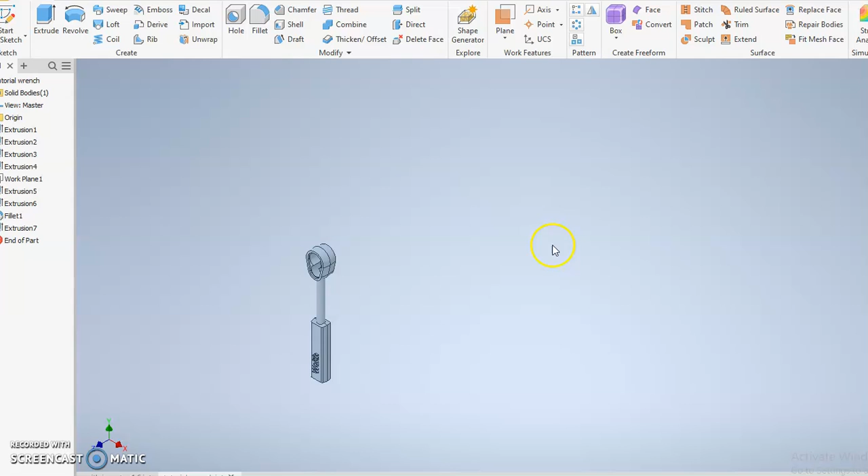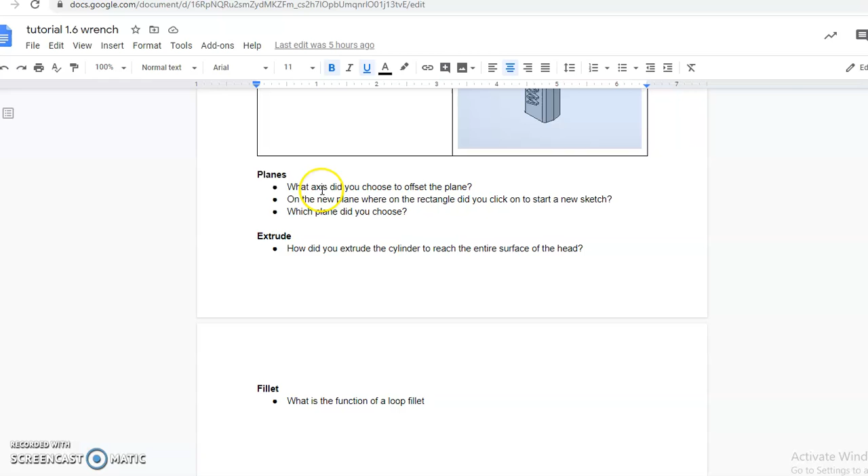And here we go. All right, we're going to make this little wrench guy. This actually would be the inside socket of a wrench without the outside of it with a little square thing, but it's a pretty fun one to make. So, as always, go to your tutorial, and guess what? They're getting shorter and shorter. So we're just going to do planes, extrusions, and fillets.

Aside from Planes, Trains and Automobiles. Name the actors. You've probably never seen it. Anyway, no big deal, but it's a fun movie to watch if you ever want to.

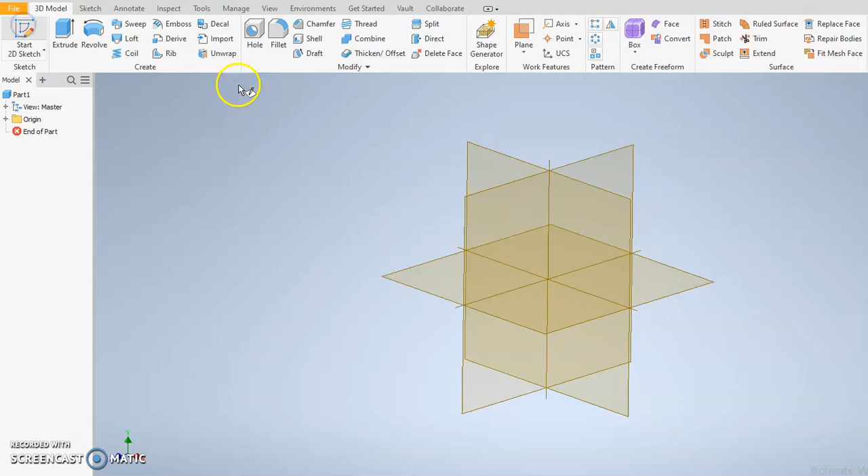So here we go. We're going to go File, New, English, as always, standard (in).ipt. And here we go. Start 2D sketch. And XY plane as always. So, starting off with just drawing a line. So this is going to look really similar to the last one at the start. We're just going to draw some vague angled line right here.

So this is going to look like the keyhole that you just got done making. Or it might have been 2 videos ago. I don't know. I make so many of these, it's hard to tell.

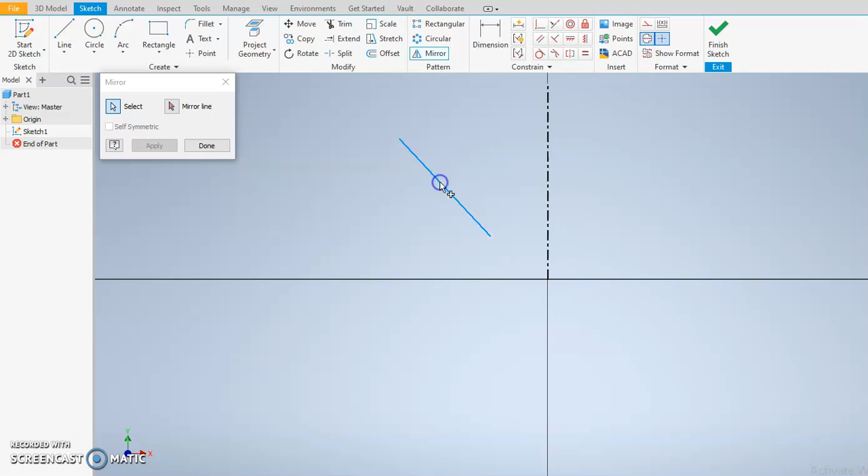All right, so line, another center line, right down the middle. All right. Guess what we're going to do next? Mirror. So click that line, mirror, click this line, press apply. Just so you know, if you actually click this twice, it doesn't matter. If you click it once to select it, then you choose apply, and then you mirror it again, it's fine.

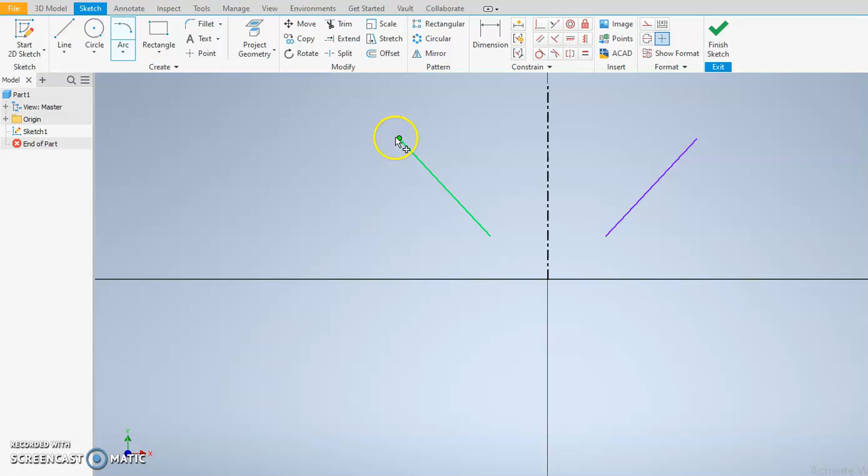Uncheck that guy. Okay. Arc. Same thing. Tangent arcs. Boom. Boom. Boom. Make sure you hit that dot.

Okay, next step is, I got to move my cat here.

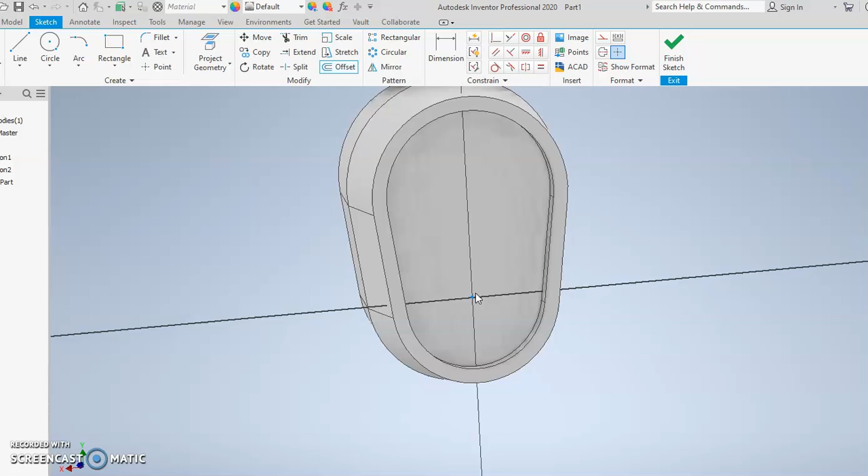Okay, next step is we're going to do a new sketch on this plane here. Sorry, I about choked. All right, so we're going to show you guys some handy little tools. So luckily for us, this one already has a dot on it because I need the center part of this circle here. So I'm going to just press circle right there. And I'm going to click the middle of this. I'm going to make this 0.75.

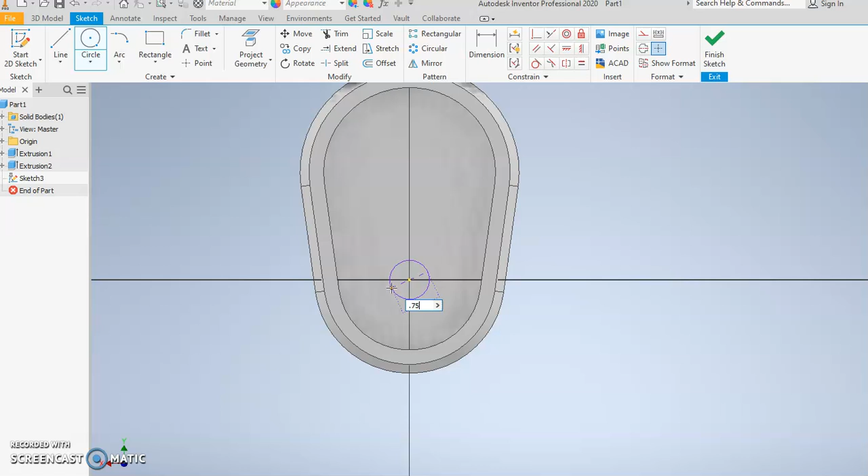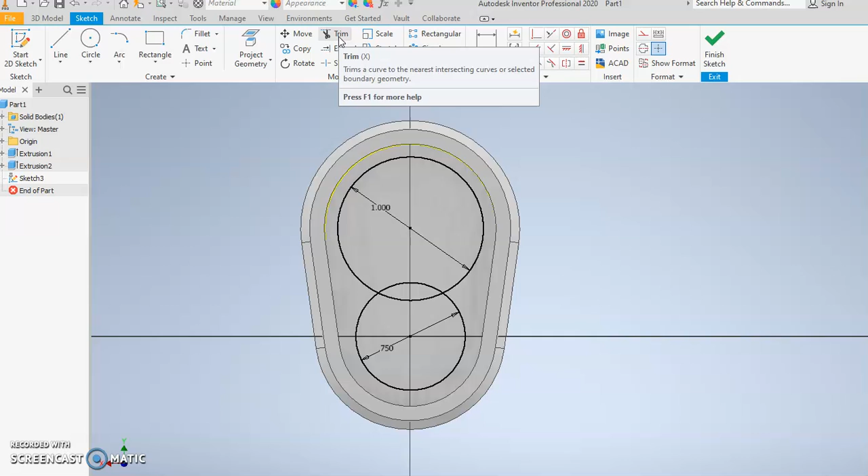Now, I need to get this one here too. And if I touch this, I'm not clicking, I just touched it, it'll give me a circle as well. So I'm going to make this 1. Got it. Okay. Sorry about that. I made a little mistake. So I need to do a trim. Let me show you something really cool about trim. So if you click trim, and if you left click and hold, you can trim multiple things at one time. Really cool little tool there. So do that and then press finish sketch.

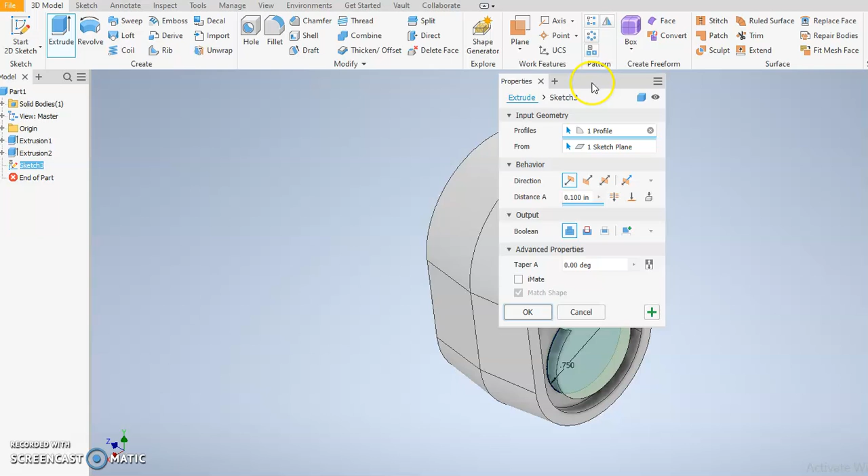Now we're good. So we're going to do another cut. We're going to press extrude. And you're going to go in 0.75. So 0.75. I said 0.75, folks. So it should be getting to where it's near the bottom of it, but not quite there.

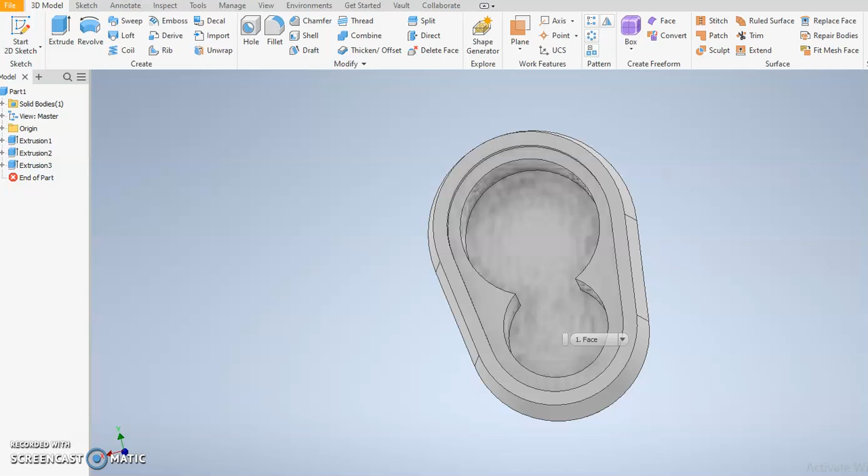So I could do this next one in 2 different ways. I'm going to do this the easy way. So let's use the hole feature. Try and avoid making a sketch if you can by using hole features and other things like that. It'll save you a lot of time later on, and it's good practice. So anyway, we're going to click somewhere in here. I'm going to click the edge. And we're going to make this 0.5 for this one. So just take this at 0.5.

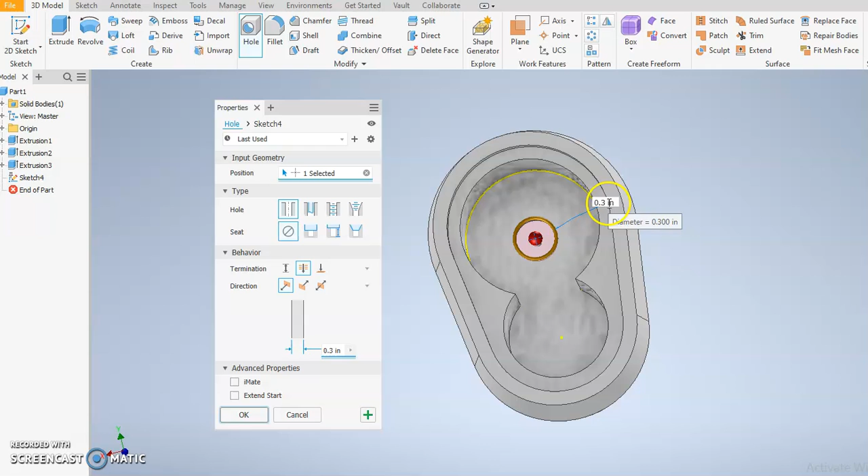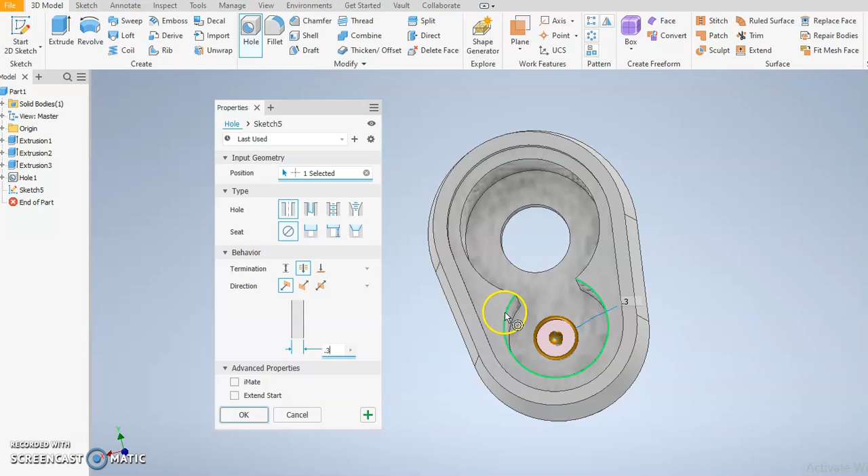And actually watch this. I'll just go ahead and press OK. I'm going to do it again. Another hole. I need to do that because otherwise it'll change them both. So I thought I could do it both at one time, but I don't think I can. So I'm going to choose here. This one's going to be 0.3. And once again, you have to click the outside circle to set it. Otherwise, it's not centered. And press OK. So now we're good. So the actual head of the wrench is done.

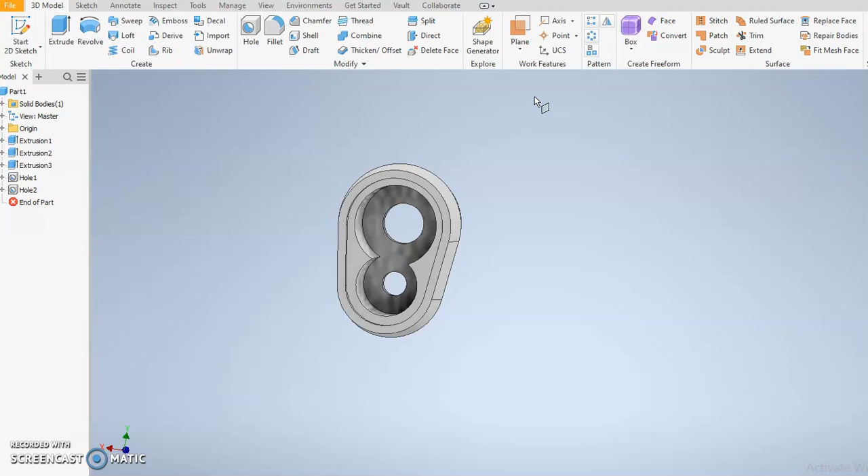Now we're going to learn how to do an offset plane. So to do these, you go down arrow for plane and go offset plane. Follow me step by step, please. Don't worry about the worksheet yet. Hit plus on the origin. This will allow you to see different planes on your object. So this is why it's really important to have a definite starting point. So I'm going to choose the XZ plane. Now you see this, I can pull it down. If I go down, it goes negative.

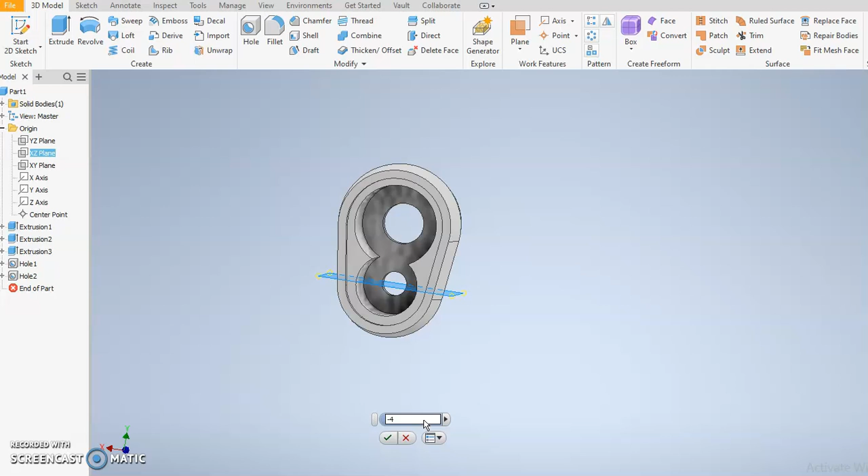So I'm going to go -4 and press enter. Zoom out and you'll see it. So I know on the sheet it will ask you what part of the square do you hit. If I click the middle, nothing's going to happen. So I need to make a new sketch right on here. But I just want to hit this right here. So I'm going to click on this work plane and go create sketch.

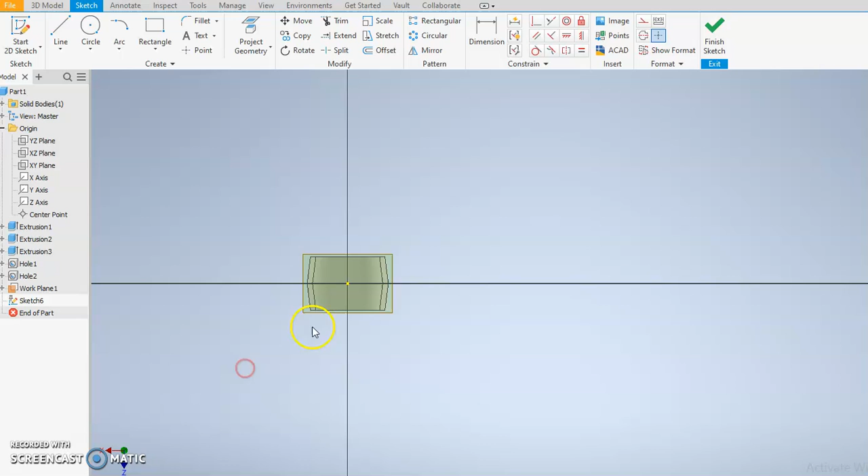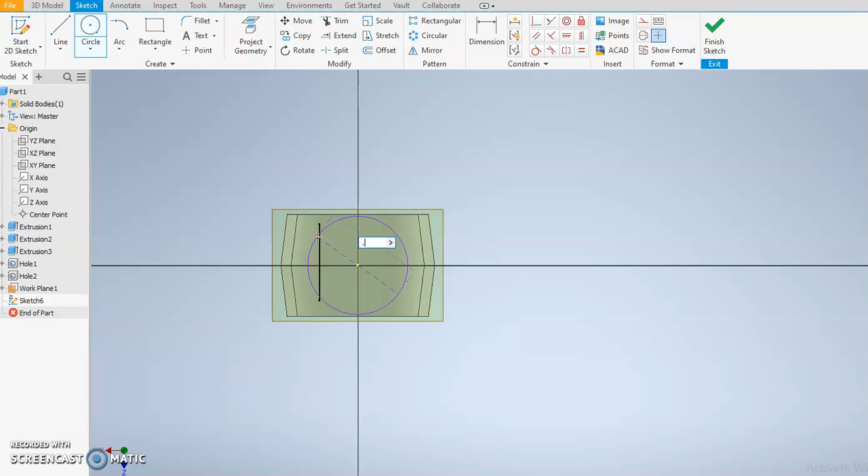And there we go. So the great thing about this, the reason why you did the symmetric extrude at the start is so we could keep this middle line right here. It makes life so much easier. So next we need to do a circle. All right, basic old circle. And we are going to make this 0.75. Press enter. Hit finish sketch. Okay. The next thing on the worksheet I do is a different type of extrude.

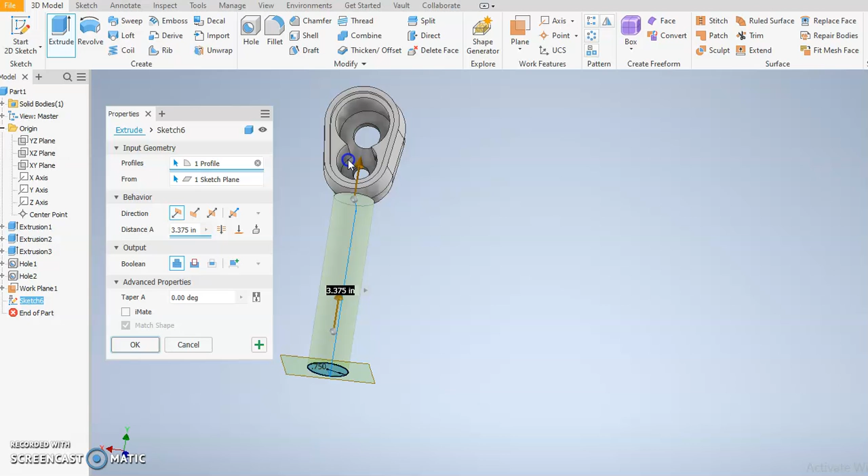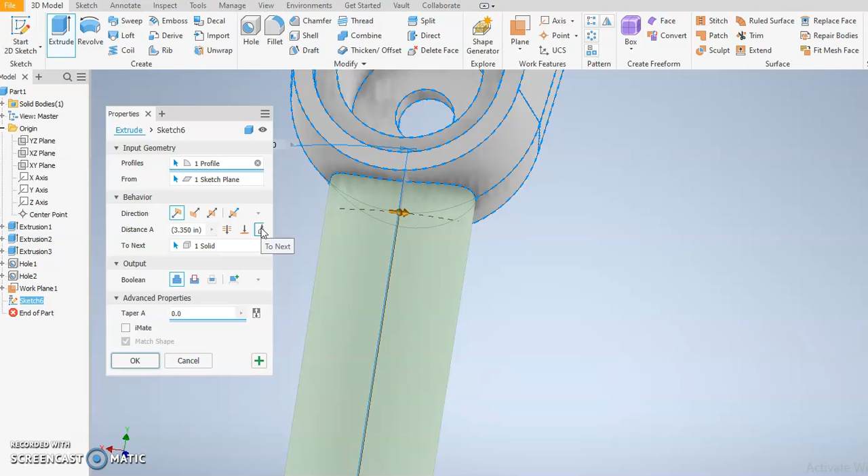So follow me carefully. You're going to click extrude. And now you could just extrude this all the way up here, but the problem is it's not going to create a good attachment to the head here. So here's what I'm going to do. There's a To Next button, and what it does is it shoots it right to the top, so it creates the curvature right there. It doesn't go through it, it just hits it, and it hits all the curves. So that's what I want. So it's this little icon right here that says To Next. And press OK. We're rolling along good.

All right, so I'm done with this work plane, and I hate seeing them on the screen when I don't need them. So in order to get rid of them, you want to left click it, and then there should be a visibility. And if you click that, it goes bye-bye. Okay, so we got one more step left, and that is making the handlebar down here. We got a few more things to do to it, but that's pretty much it.

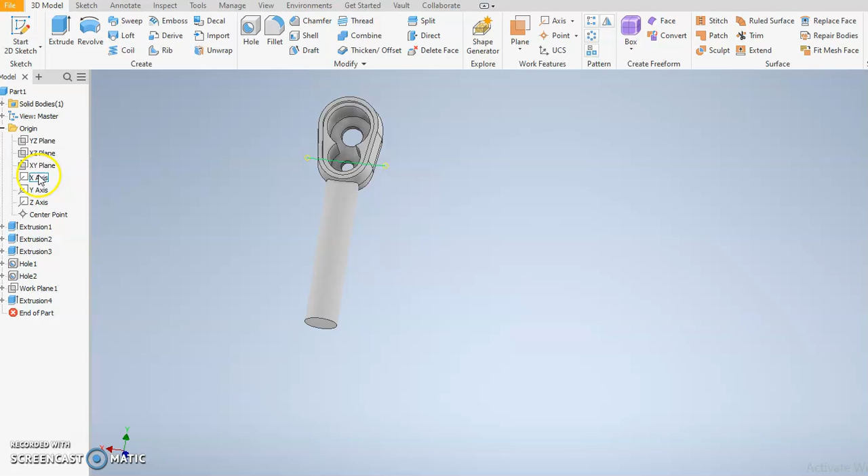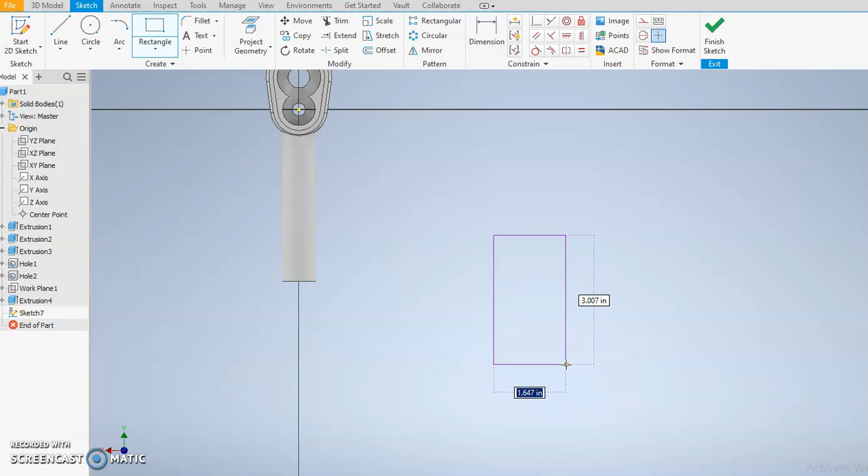So I'm going to go on the XY plane now and do a new sketch. So I'm going to do this really weird. You might think it's weird, but actually it will make a whole lot of sense once I'm done. So somewhere out here, we're going to make a rectangle. Just dump it out here somewhere because we're going to put it in the right spot. So remember the tab button going back and forth? The bottom should say 1, the side should say 4. And press enter.

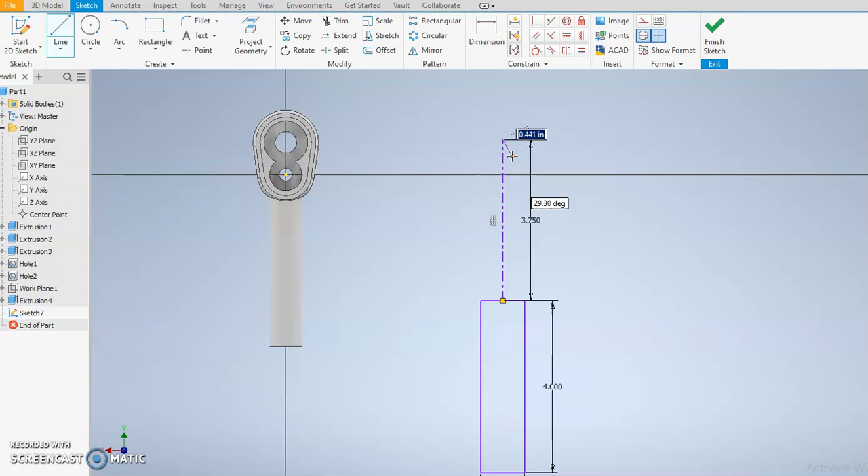We're going to try to line this up with the middle of this, but to do that, I need a line. So we're going to do a center line from the middle of this going up 3.75. Okay? So now I'm going to show you guys how to move something. You gotta move it, move it. Sorry.

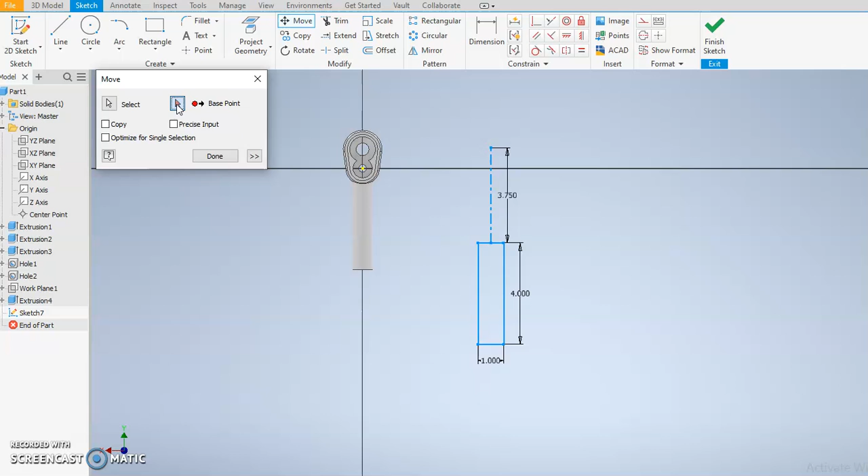Actually, don't highlight anything. Hit move. There's a move button up here someplace. There it is. Highlight the whole thing. So kind of like AutoCAD, you highlight, but then you need a base point. In AutoCAD, actually same thing. So I'm going to click base point once I have my object highlighted. Click this, and then click the middle.

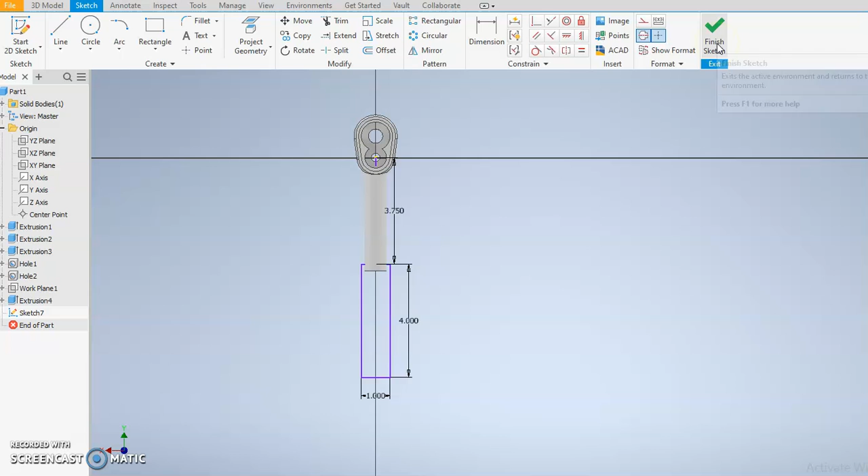So you might have been wondering why it was really important to anchor this to the middle. This is why. It makes life easier. I could have done a project geometry, found the center point, done a few more steps, and it would have worked fine too, but I don't like working harder than I have to. Press your finish sketch. Next, we're going to do an extrusion, just like we've done. Guess what? We're going to do a symmetric one, and we're going to make this 1, so it's as wide as the head. Press OK. Okay, rolling along good, folks.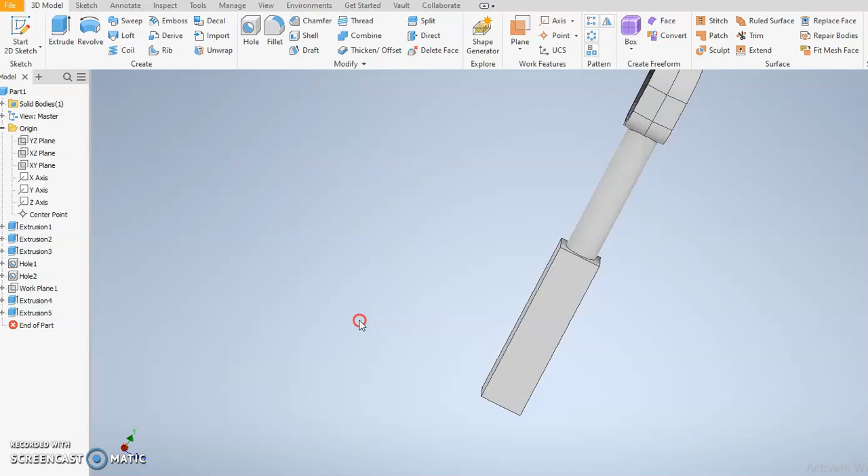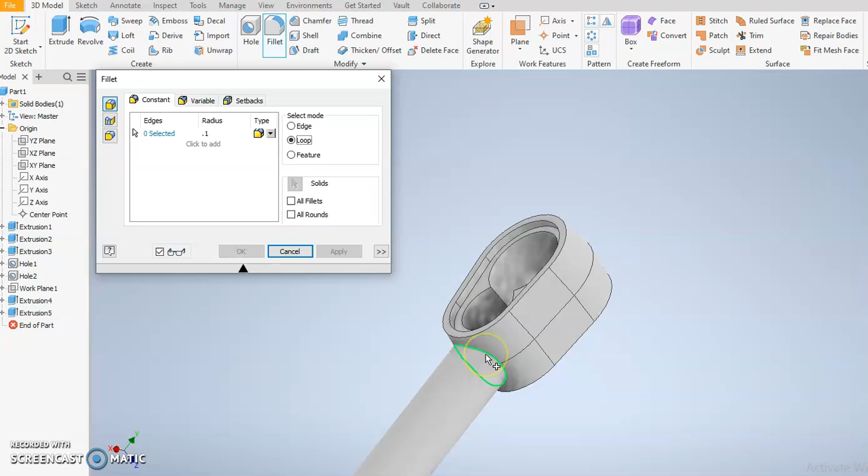So I'm going to show you guys a new fillet here. This is my new friend. This is called a loop. Okay, the function of the loop is it helps get around those complex curves right here. So here's what I'm going to do. I'm going to set this to 0.1. I'm going to click loop. Oops, that did the wrong one. I apologize. Fillet, loop. Now, if I click right here, it'll just do the underneath head. I'm also going to do it down here too, just so the wrench has a bit more strength when it's being used.

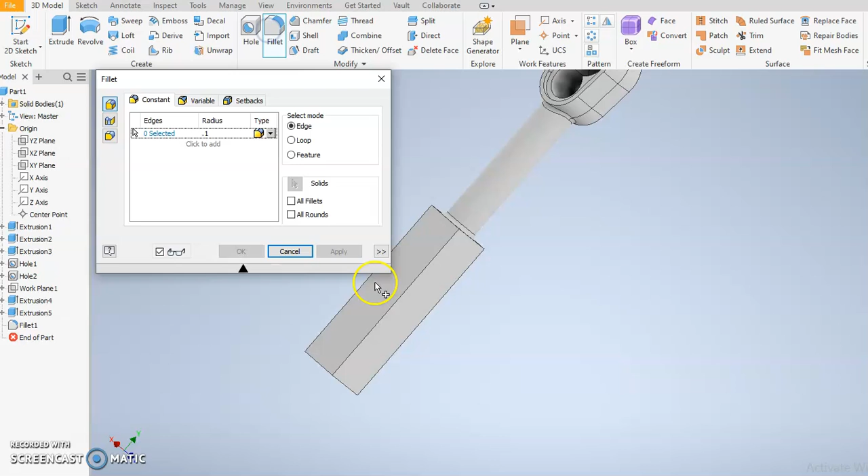You'd also notice that the sides are way too rigid on here, so I'm going to do a fillet there too, and we'll just keep it that same 0.1. Probably should have just stayed in that command and done it anyway, but that's okay. So we have all those things filleted.

Now I want to do some basic text, just so I see your pretty little names on here. So we're going to do a new sketch right here, but I'm going to do this one a little differently. I've learned with making text that if you just dump in text someplace, it can go all different ways, and then you have to rotate, and it's a big pain. I don't like doing that anymore. So I'm going to draw a line here, just some vacant line right there. It doesn't matter how big it is. It's just going to be our base point.

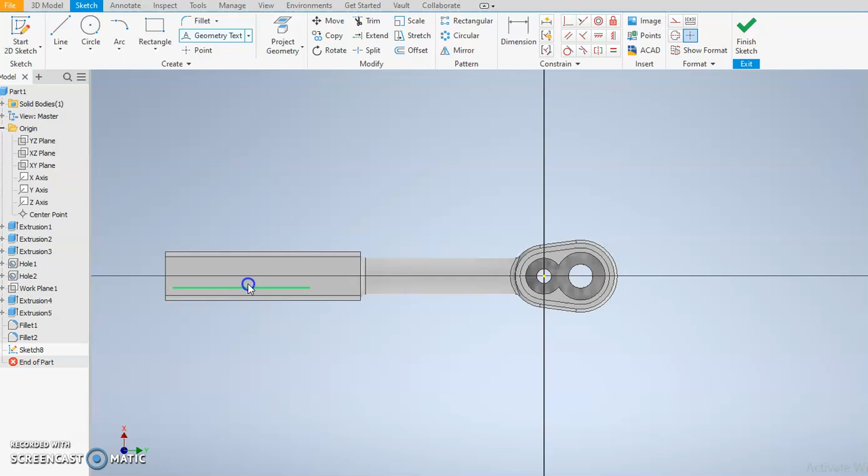So I'm going to go down arrow and geometry text. We did this a couple videos ago, but it was on an arc, I believe. So click this. I'm going to click the line right here. I'm going to change my text size to 0.4 and type in your last name or your first name or both. Press Finish Sketch.

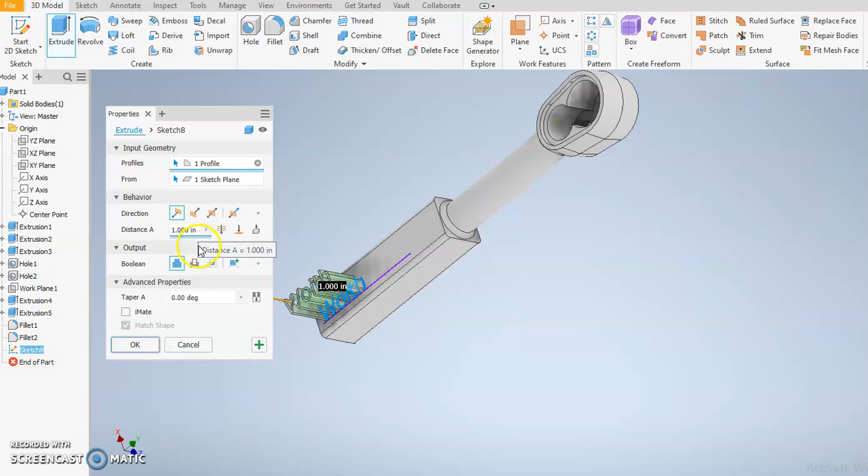Okay, so I have two options here. I could extrude it. It'll work fine. I could do a 0.1 extrusion, or I can do an emboss. Doesn't matter. I just want it above the surface. I'm going to press OK. It's done. You're finished. Good job. If you wish to color it, go ahead. I could care less. So now remember, we're going to save these.

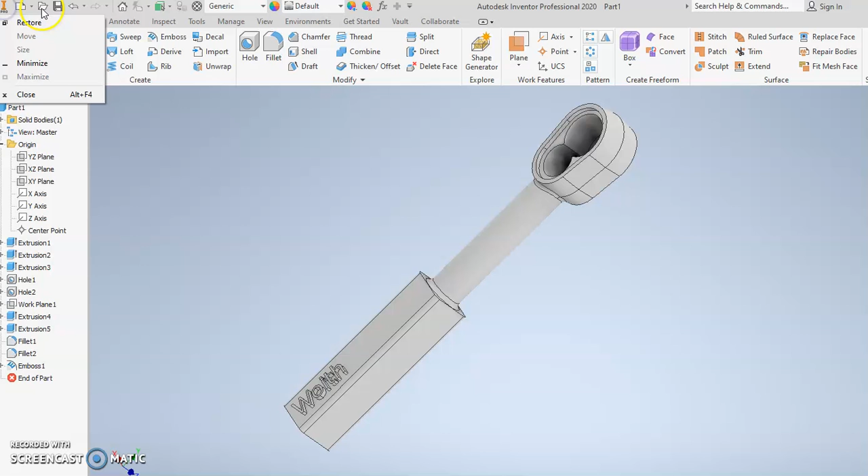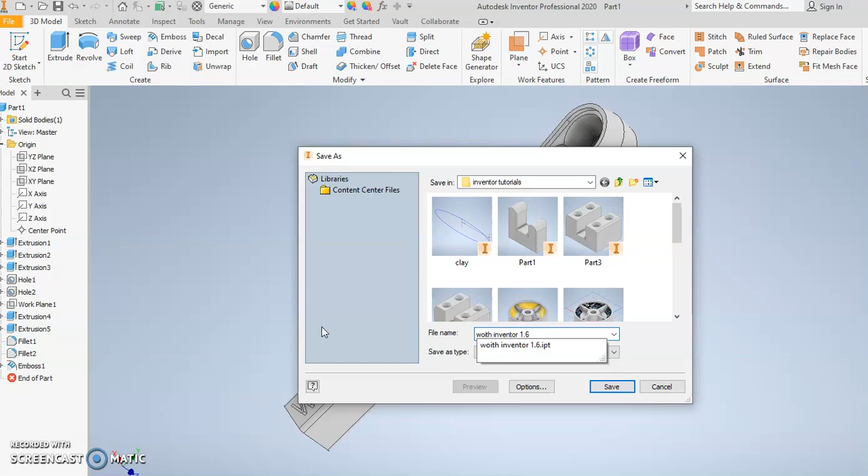Save as. We're going to do your last name, inventor, can't type today, 1.6. I already have one on here, so I'm going to add an A afterward because I've done this twice. So there we go.

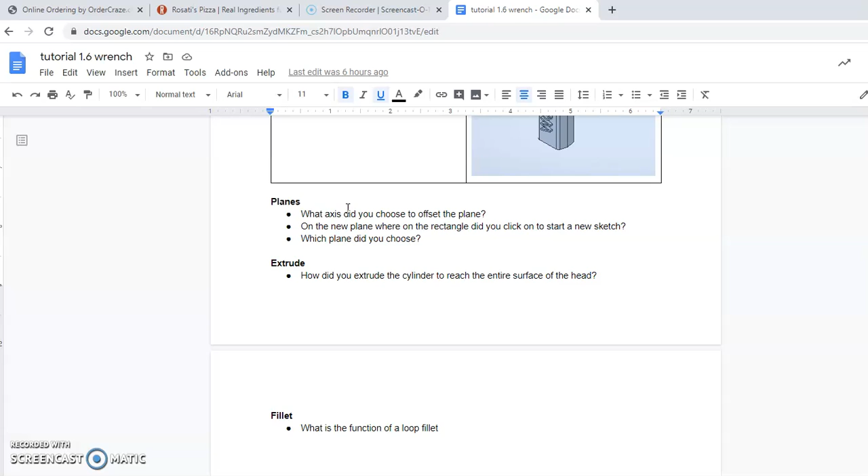Video complete. Good job. Make sure you get your worksheet finished. So the fillet loop, extrusion, there you go. Answer the questions. You're good. Worksheets are going to get smaller and smaller for these, but there may come a time when we do the constraints that it might get a little bit more.